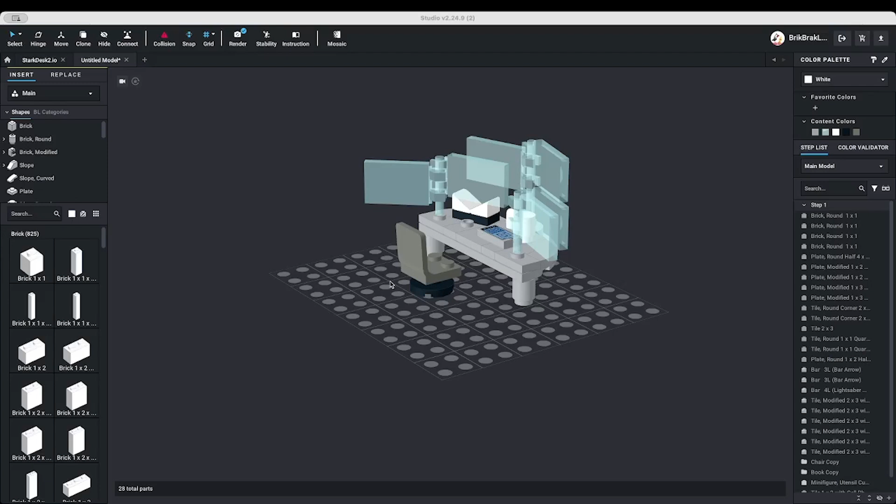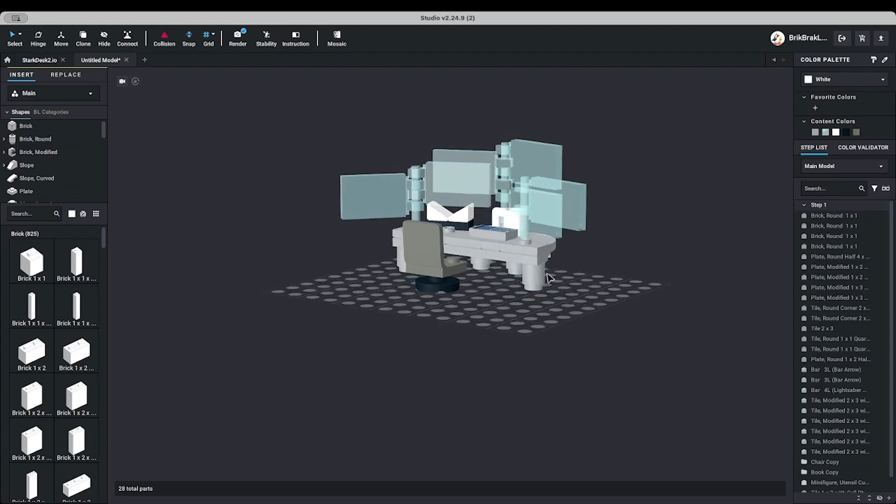Today I'm going to show you how to make instructions. This is my way of making instructions—everybody has their own way, everybody does their own thing. This technique can be applied to small items like Tony Stark's desk here, or to big items like modular builds. It just takes time. Let's get to building.

So here we have everything in step 1, because we've been designing, we've been creating, we've been making something awesome and just letting our creative juices do their thing. We've paid no attention whatsoever to the fact that everything on the build plate is in step 1. There is only one step, guys, one step to this build and none others. So we're done, congratulations—no, we're not done.

We need to make more steps. So what I do is start clicking the add step button, or you can go down here and just start clicking it. It's a little bit responsive—you just gotta click, click, click a bunch. You're gonna be clicking more.

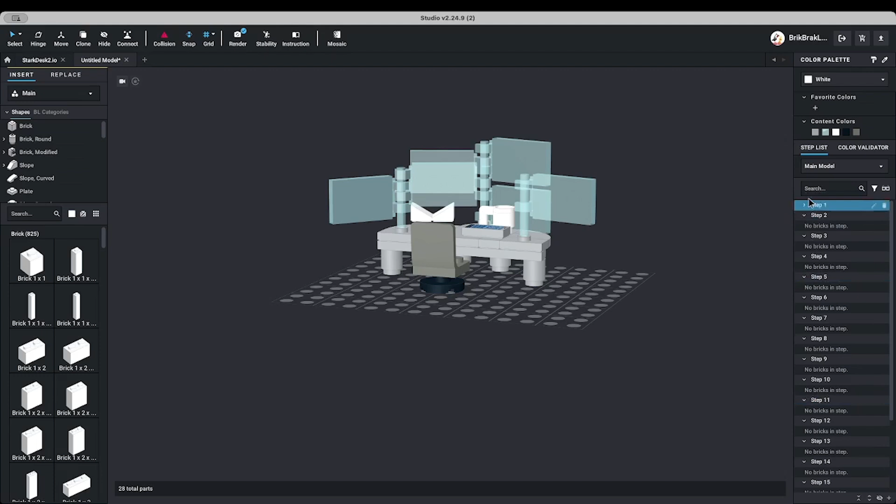Everything's still in step 1, so I'm gonna select it all. I'm gonna go over here to where these steps are, right click, go to Move To, and move it to the next step. In this case, it's going to create a new step, step 20, and put it all in there. Now if we scroll all the way down, you'll see everything is there.

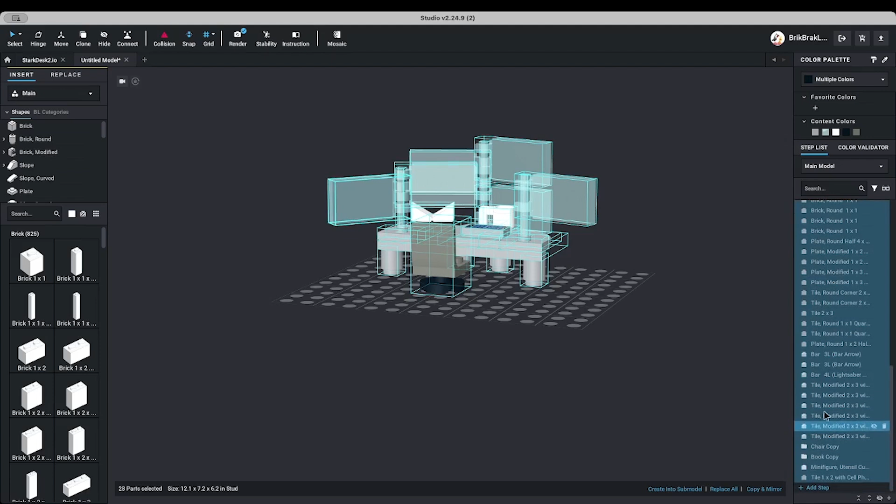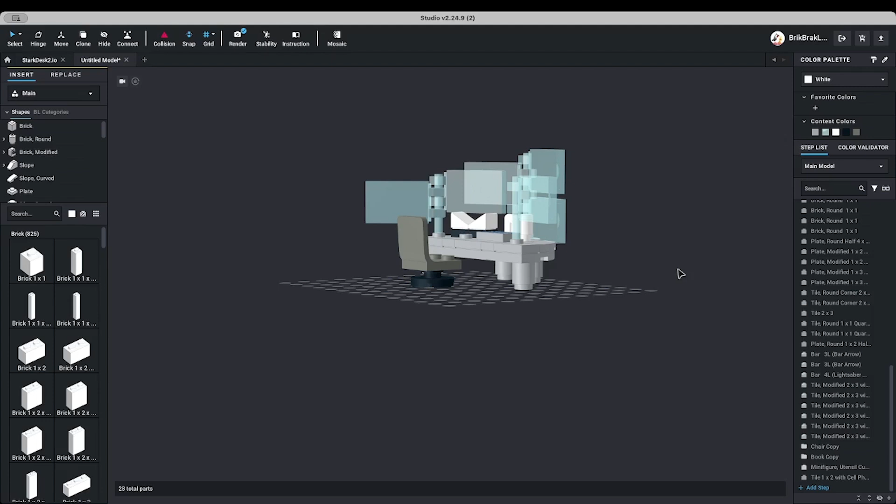Then I unselect and I pick. The way Lego works, in case you didn't know, is you build from the bottom up. You start with a base plate and build up. There are some exceptions to this, but that's kind of the philosophy I go with—build from the bottom up and you'll be fine.

So I'm going to start with the bottom of this piece, which happen to be the legs. I'm going to select this leg and hold down either the command key if you're on an Apple, or the control key if you're on a Windows machine, to select all of those legs. They're highlighted here, and this is going to be my new step 1. I'm going to move it up to step 1.

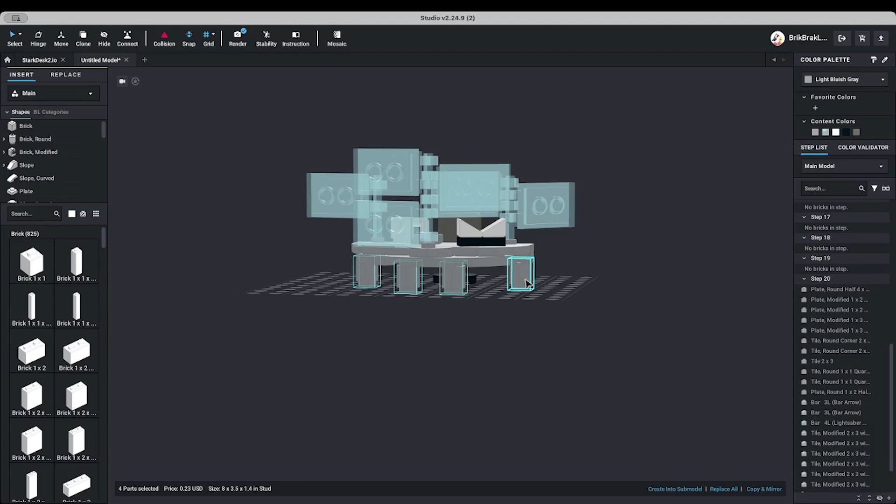Then, because I don't want to get confused and inadvertently put these legs in a different step by misclicking or clicking the wrong thing, I'm going to right click on these pieces and hide them. So now they're hidden—they're up here. You can show all if you need to, but I'm going to hide them, and I'm going to hide every single step that I do. If you're confused, this might make more sense because the process is repeated several times over.

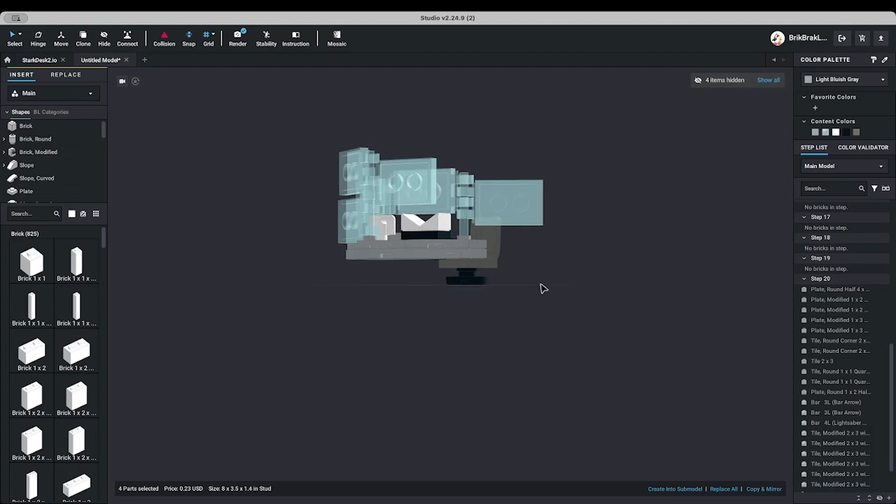So the next piece, attached to my legs, is this plate here. If I had multiple parts in this particular layer of the build, I might add them all to the same step, but this is just going to be step number 2. So I'm going to right click on that piece, move to step 2—there it is, step 2. Then I'm going to click and hide it. For a lot of this process, I'm going to be looking at my build area from this angle, looking up at the pieces.

So then I think what I'll do is go with these straight jumpers. I'll go with these jumpers—we'll do all the jumpers. Make 2 L-shaped pieces going on here. So I'm going to move these to step 3.

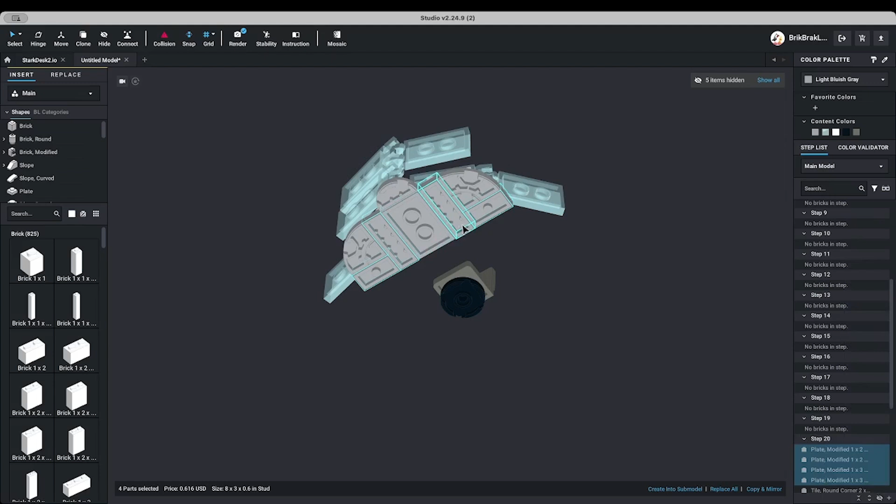This is one of those things where if you have multiple steps, you might be like, oh, which step am I on? All my pieces are selected. Let's scroll up to the top—okay, step 3 has no bricks in it. So let's go back down here, right click, move to step 3. Again, hide. We're still on this layer because we've got multiple pieces on this part of the desk.

So we'll start with this one next. Maybe we'll do these 2 quarter pieces—those can be step 4. I only hide it because I don't want to get confused and accidentally put these pieces in the wrong step. You'll see that right away when, oh, I already forgot which step we're on—you'll see that right away when we get over into the instructions maker. So step 5 is our next step.

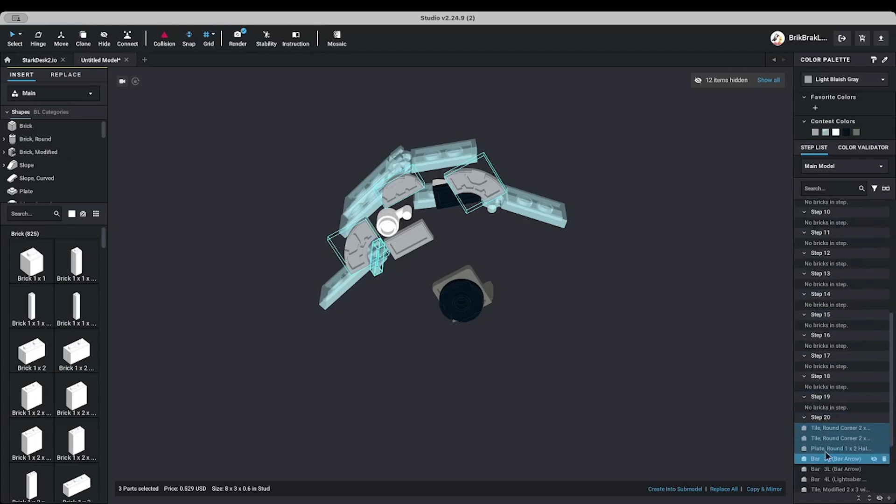How was everybody's day today? This was a crazy week for me. I was under the weather, so I missed a few days of work. The weather was hot, and then it was not. It is very windy today where I'm at.

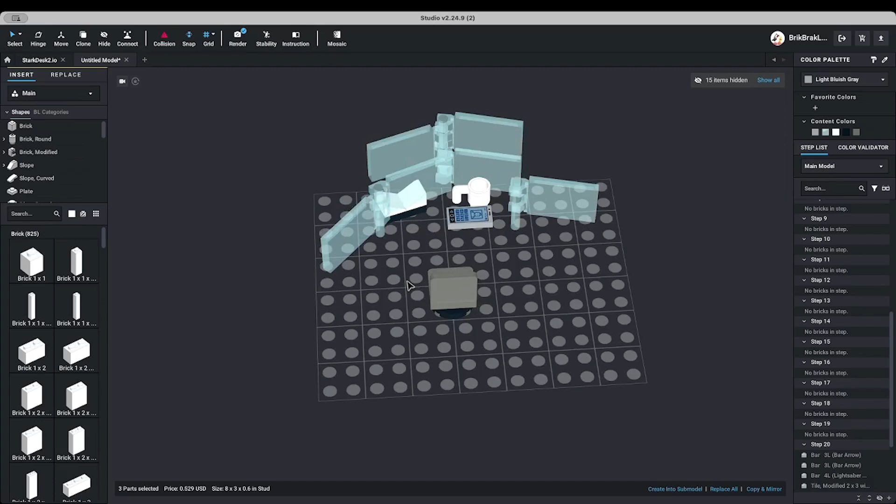So the next layer could possibly be these accessories, but I kind of want to get these computer screens out of the way first. That's just a preference thing, but I feel like accessories like the book, the cup, the cell phone, that's like garnish - the cherry on top where you're almost done, you put these on and it looks fantastic.

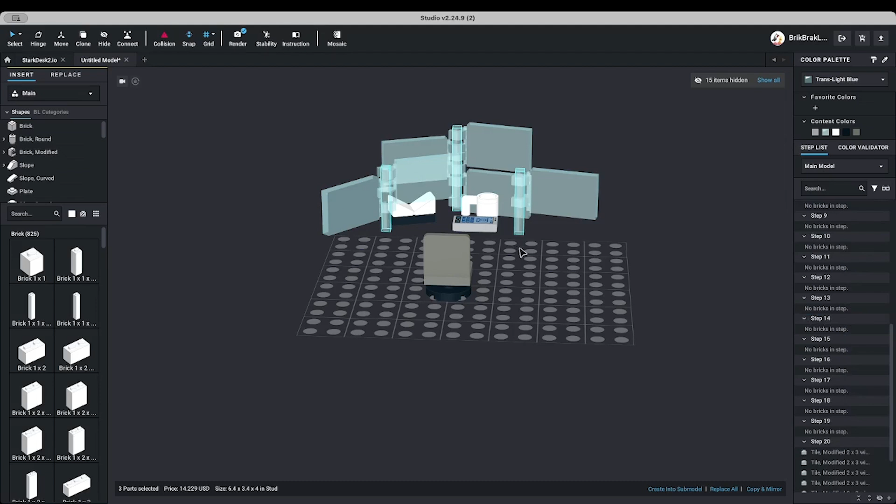So I'm gonna start with these monitors. I want to get these three bars, these 3L and 4L bars, out of the way. I'm gonna make this my next step, which is gonna be step 6. And if you're confused, just bear with me. This will all make sense in 10 minutes, maybe less.

We're gonna hide those. We got monitors facing one way and then the other way, so let's do these monitors first. Let's start with these 2 monitors on this bar.

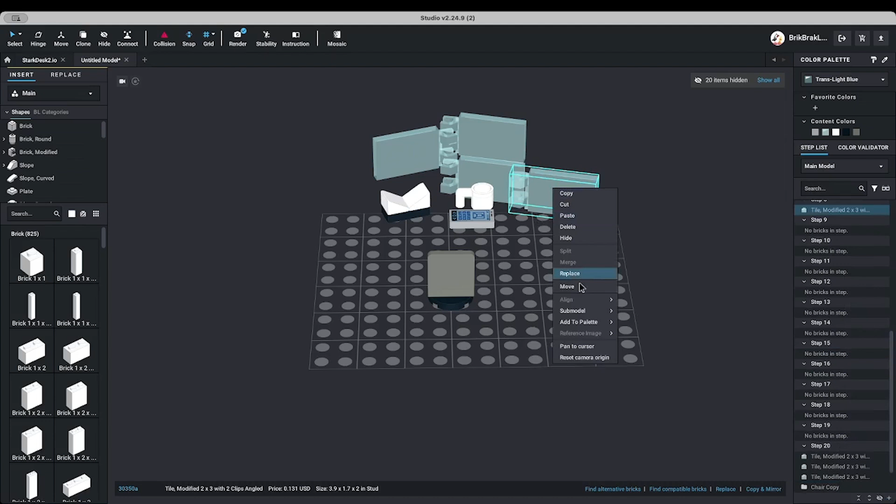Those can be step 7, hide them. This can be step 8 by itself, it's a lone display. Hide it. And this can be step 9. And we'll hide it.

So now we're basically left with a couple things here - our little accessories and 2 submodels. Submodels are important because they appear in our step viewer as a little folder, but there's multiple steps within them. So let's start with this chair. We're gonna say that this chair is step 10, that's where it's gonna show up in our instructions.

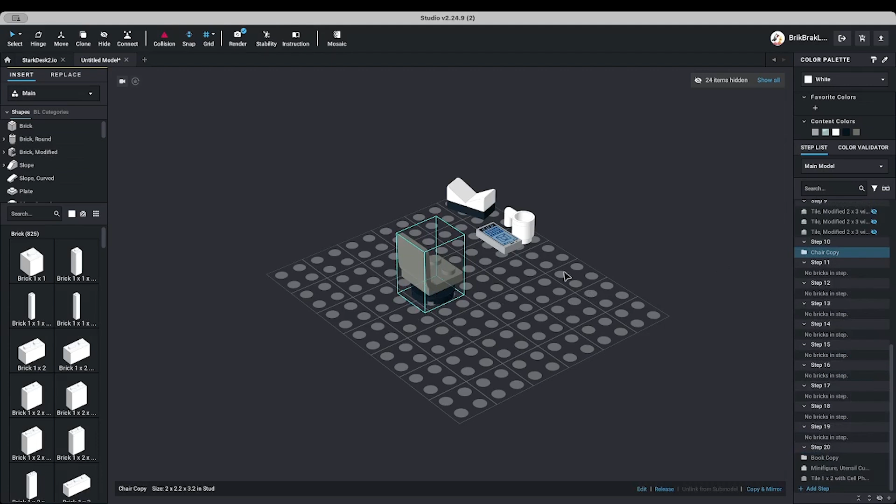However, now we have to go inside this submodel. So we can right click on the piece, go to submodel and view. And you will notice, well, we got multiple steps here. Yeah, so this had already been done, because this is a mock that I have up on Rebrickable, so I had copied and pasted this. This wouldn't look like this.

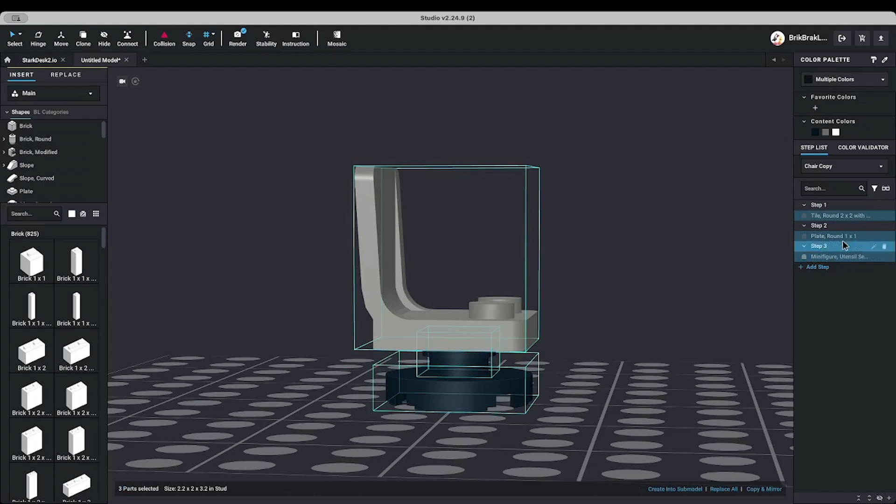What it would look like is, if you were building this from scratch, everything would be in step 1, and you would have no other steps. So again, same process, we're gonna add a few more steps. Spoiler alert, we only need to do this in 3 steps.

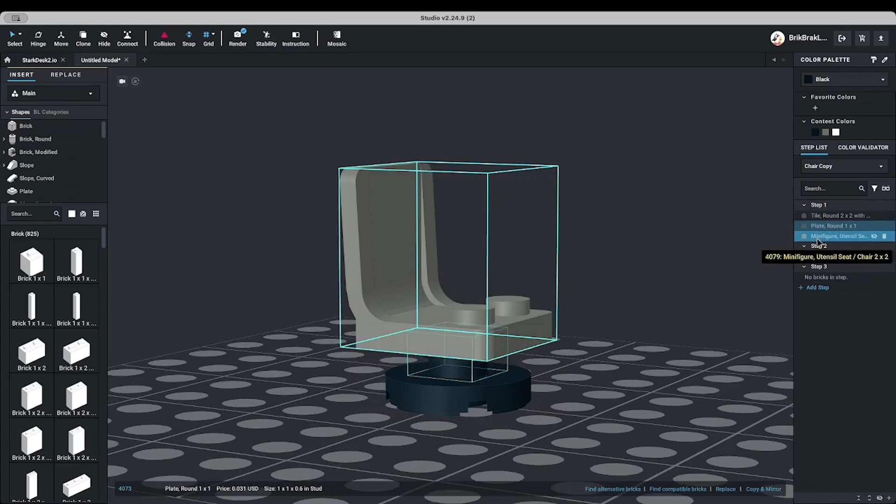We're going to make building from the bottom up. This is our base, that piece there, the 2x2 round. So we're just gonna take these 2 guys, we can drag them - you don't have to right click and move, you can drag them. So there's our first piece, there is our 1x1 round, and there's the chair itself.

So that step is done. And when we go over to the instructions, we'll see what that looks like. So we got our chair, let's make it disappear. Then we will do...

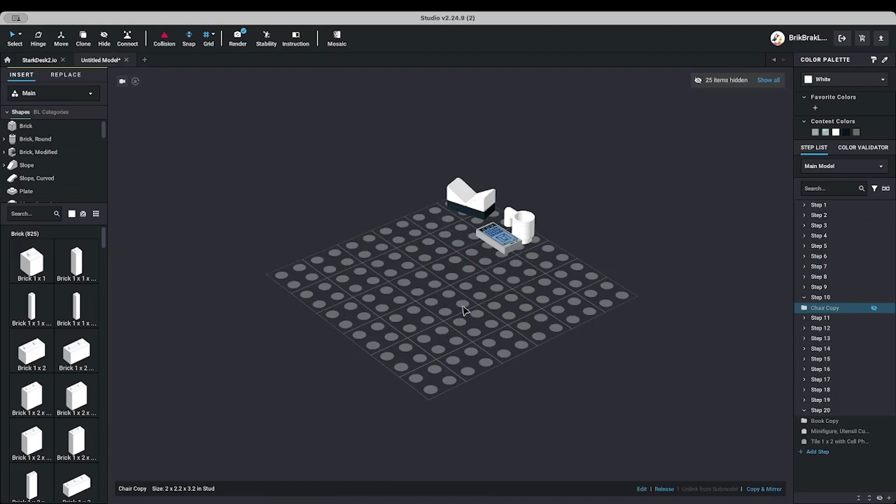the cell phone and the mug can be another step. And when you go in and out of submodels, it'll collapse all of your steps. But if you go down here, the arrows pointing outwards will open them all up. So if you click the down arrows, it will collapse everything. We still are working in them, so we want to open them all up.

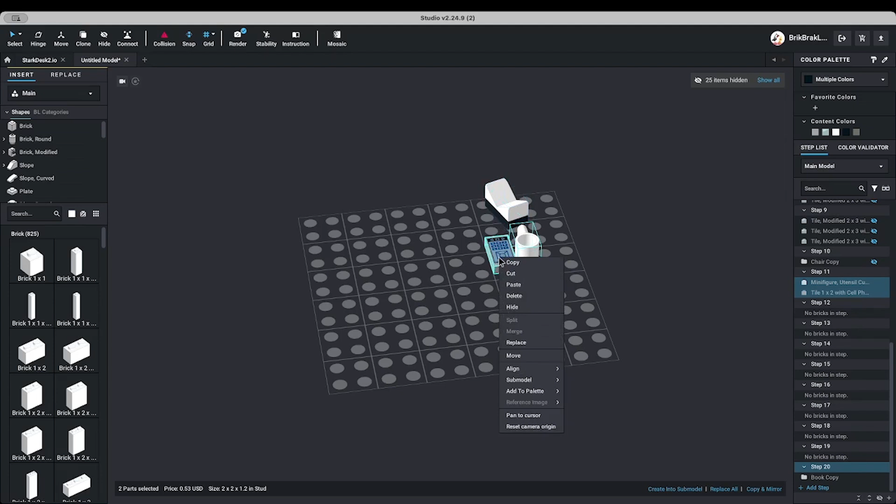All right, so our chair is step 10. We are going to make the mug and the cell phone step 11. Hide it all and round it off with this submodel of the book, which will be step 12, the final step in the piece.

Make sure our submodel of the book is good to go. So we select it, we right click on it, view. Whoa, that's a huge book. Yeah, see, this is what it's supposed to look like, all in one step.

So we're gonna add a couple more, we'll just add 2 steps for this. Let's not go crazy over here. We're gonna leave our plate there. We're gonna take our 2 slopes, drag them down here.

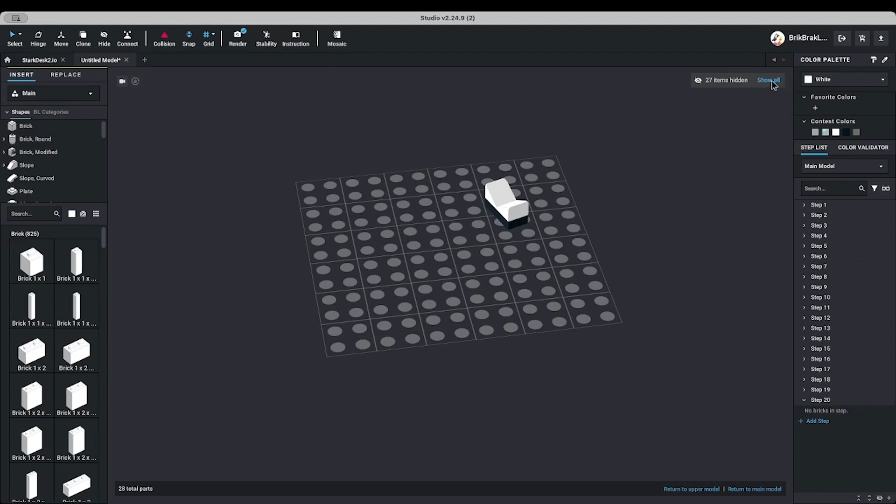Now, cool thing we can do - let's go back to, all right, so everything's there now, so we'll show it all again. We got all our steps in one place. Let me just show you something cool real quick. Oh, something happened, everything went crazy. Let's lift it all up, put it back on the plate.

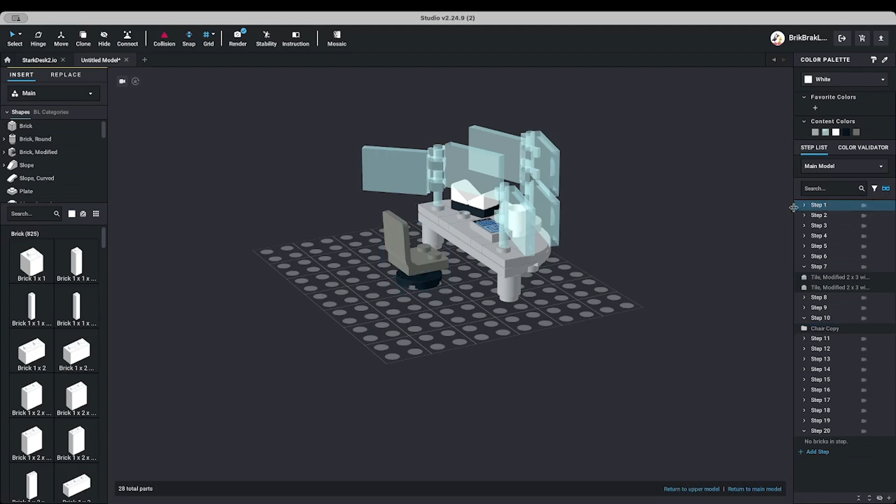If you get confused, or you have a submodel or the whole model that has multiple pieces, you can put this into what is called step view. And step view, I'm going to go back up here - step view is going to show you whatever step you have selected. So I have it in step view.

I click on step 1, it's only going to show me step 1. I click on step 2, it's showing me step 1 and 2, and so on and so forth. So you can see the building process happen right before your eyes. That is a cool thing to toggle on and off.

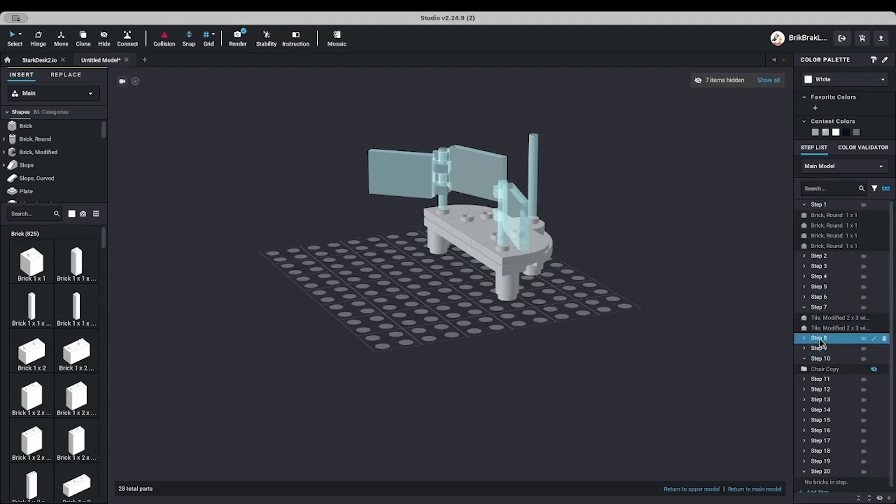Especially, this is a very simplistic build. If you were building a modular building, it's very easy to get confused. Maybe I'll do a live one day where I'll just be showing how I do a modular building. I don't know. But in the meantime, we have this.

We have all our steps in place. So the first thing we're going to want to do is save this. And now that it's saved, we are going to go into the instruction mode. And instruction mode has 2 panels.

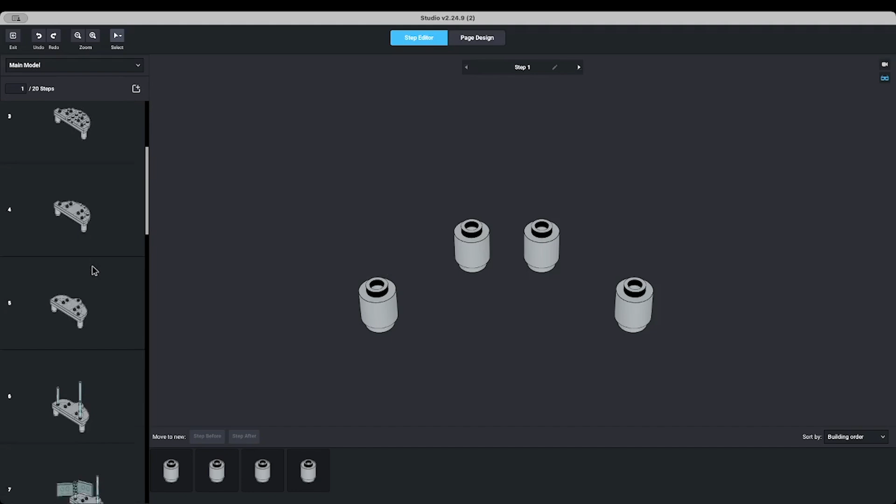It has the step editor, which I don't really pay much attention to. I'm open to hear what you think about creating instructions in the comments, because this is just sort of the way I've done it. I've kind of picked up on it on my own, seen a few YouTube videos, but this is what works for me. If I'm reinventing the wheel here, please let me know. I don't know what the step editor does except show you step by step. I'm more concerned with the page design.

The page design is what looks like your standard Lego instruction setup, step 1, step 2, and so on. Now they kind of throw them together, but I have my own little personal quirks about it. Like I like to put the inventory box over here on the right of the page, and I also like to try to line this up to center as much as possible.

Now, if this was a very complex build, dedicating one page for each item is cool, but you've got some layout options to work on, especially if you're doing smaller builds, which I recommend. If you're getting into this, don't go crazy. Don't try to build the Avengers Tower right out the gate. Build something small and awesome and go with it, because that will help you develop these skills that'll become second nature to you as far as the design process and the instruction process. So I'm going to spend a little bit of time on this because it'll really make your instructions pop for these smaller builds.

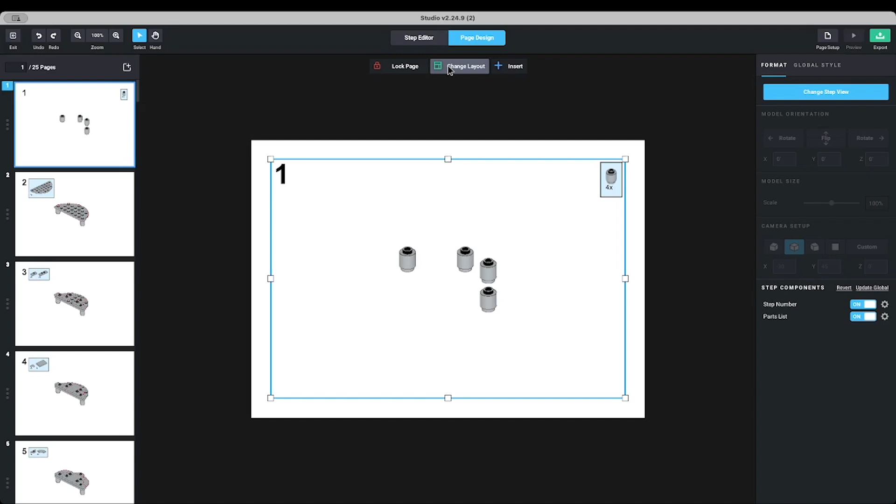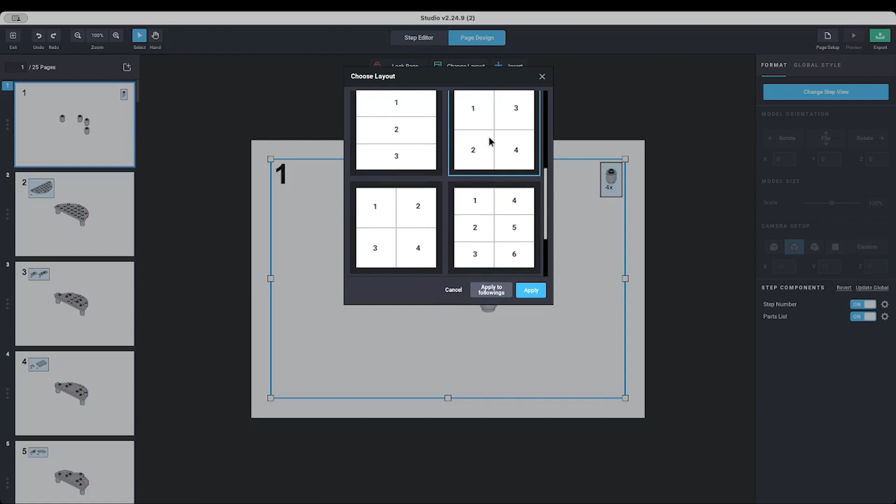So I'm going to go to change layout, and I can put multiple steps on a page. For something small like this, let's try it out. We can always go back. So let's try this: the first step's going to be here, then down here in the bottom, 2, 3, 4. You can also do 1, 2, 3, 4 - it's strictly a preference thing. But let's do this one. So we're going to click there, hit apply, and now it's going to put the first 4 steps on our build.

I had already moved my inventory for step 1 over. That looks pretty tight, so we're going to go with it. I'm going to move this one over. And another thing that I don't like is when the inventory box sort of bleeds into what it's supposed to look like, especially when it's going over pieces in that step.

So what I'll do is click on sections of the instructions. I'm going to click on the inventory box and scale this down. I'm going to pick a number - I could use the little slider, but I like to be consistent. So for this, I'm going to say 50%. That makes it smaller, but again, when you're printing it out, when you're looking at this in a PDF, you can zoom in, whatever. If the parts are still visible and identifiable, then you should be good.

So 50% for that looks good. This might be a little ridiculous, but let's try it at 50. Yeah, 50, that looks fine. I mean, it's a little over - it goes against my rule that I just shared, but it's not covering the whole piece. Same thing here, it's a little over, but let's do 75 for this one. Do it in multiples of 25, I guess. You could go down to 50 if you wanted to for this, because these are still pretty identifiable. Or 50, that's cool too. But yeah, something like that.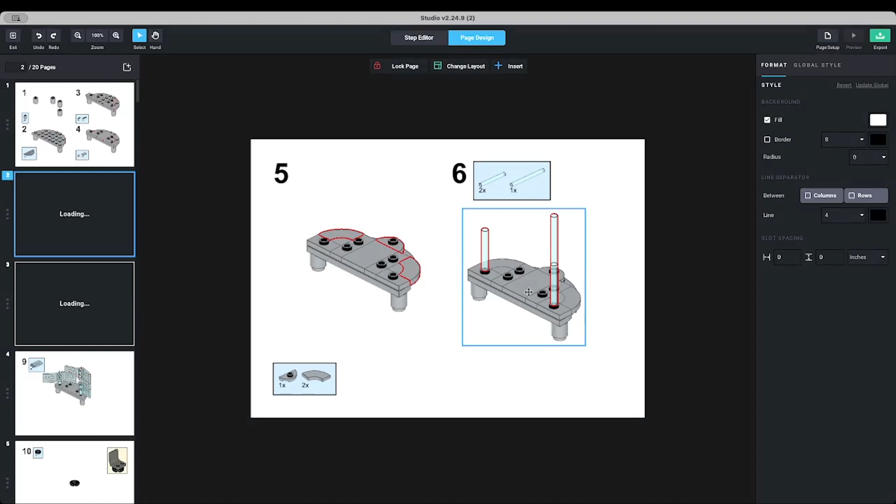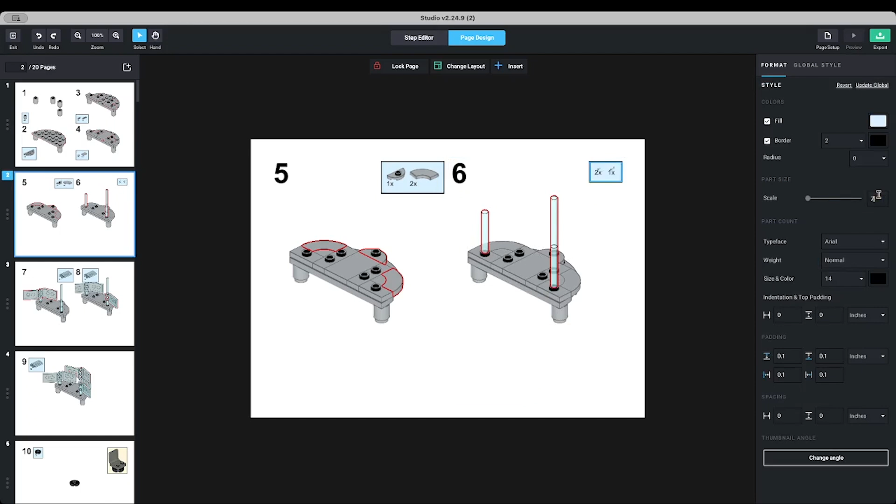It might be a better option to change this layout to maybe just put 2 on the page. All right, yeah, that looks nicer. And these are the kind of things you need to sort of roll with while you're doing this part of the building, the designing process - seeing what works, seeing what doesn't. Don't be 100% committed to one particular style unless the piece that you've designed fits on it.

I like to follow the guidelines unless they're cutting off the piece, like they do in this case. That's fine because when you change it up here, the next step will follow the pattern you changed it to, if that makes sense.

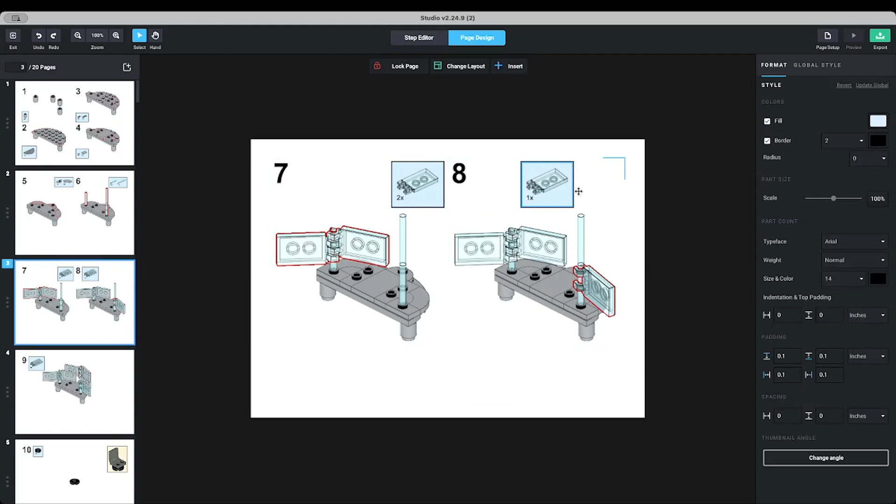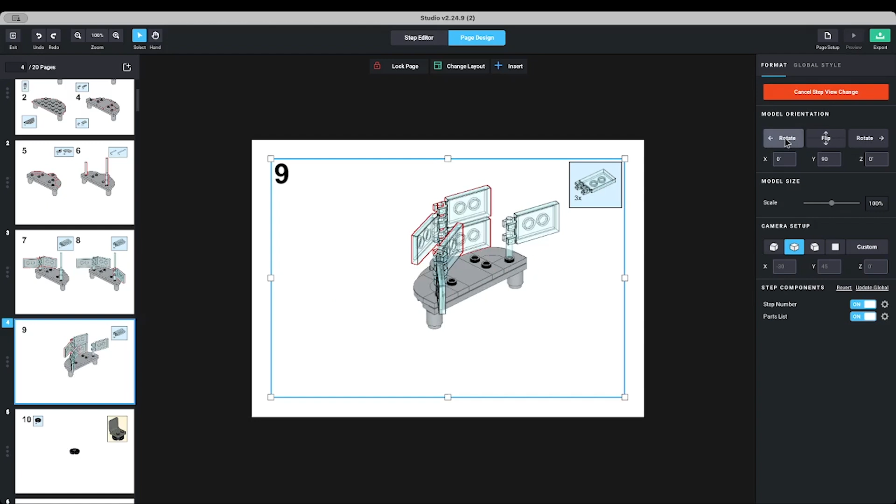Now this I'm just going to keep on one page and center it because it's just finishing up the screens. If I wanted to get fancy, and maybe it wasn't showing me the new pieces really well, I could change the step view and do things like rotate the piece to display what I'm putting on it better.

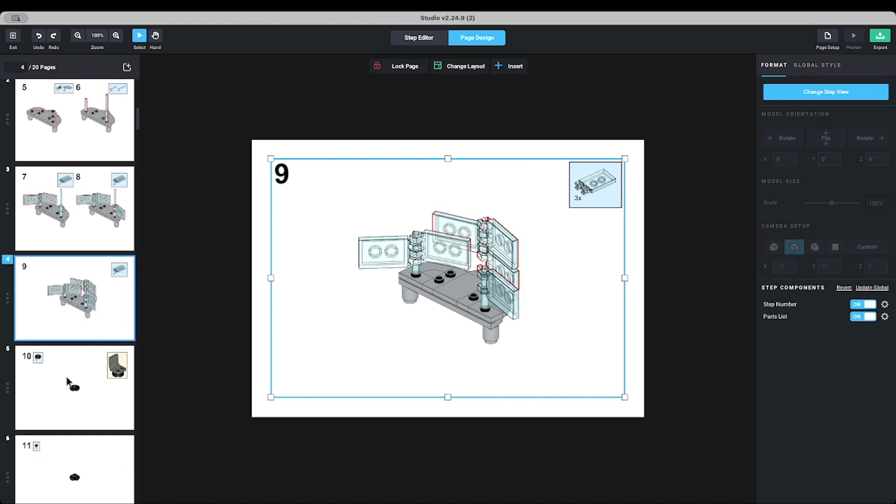For this, I'm just going to keep it the way it is, because we essentially finished in step 9 with the desk and the monitors. Step 10 is interesting because it's the start of the chair.

Now the chair is very simple, so what we can do with the chair, if we click on this, we can convert this to what's called a call out. This is when I'll click it and show you. A call out shows you the instructions and then shows you where to put it in the finished, in the rest of the build.

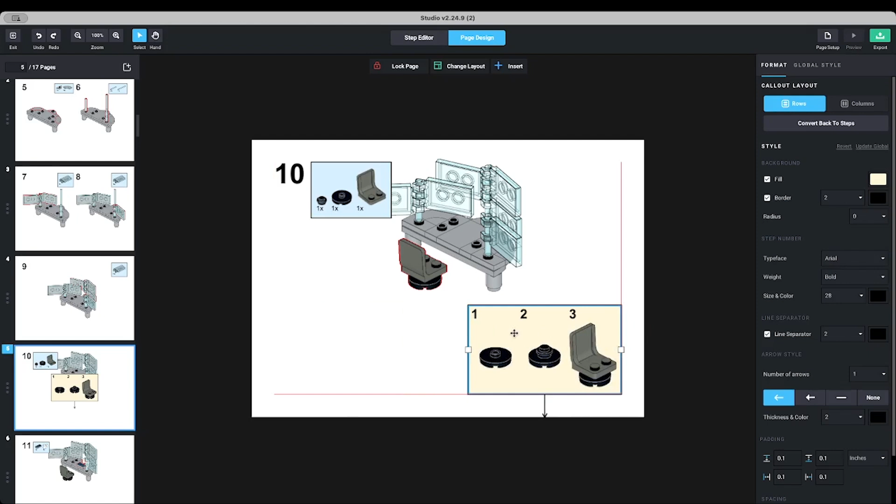We'll put the call out back over here in this corner, line it up all nice and pretty. Grab the arrow, and we'll grab the other end of the arrow. We'll continue to grab the arrow, and put it up here. So this is a call out.

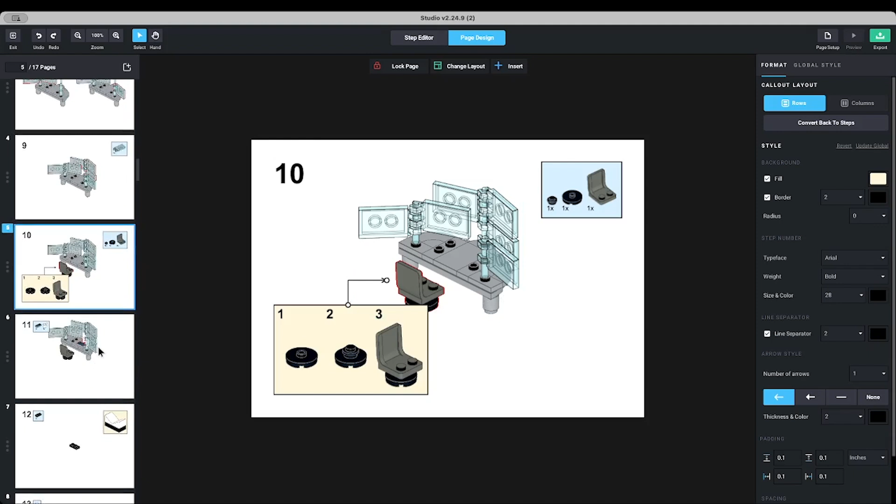This is an instruction that's showing you, okay, you do this, then that, and then that, and then you put it there in front of the desk. Call outs are cool for little repetitive items or small items like that.

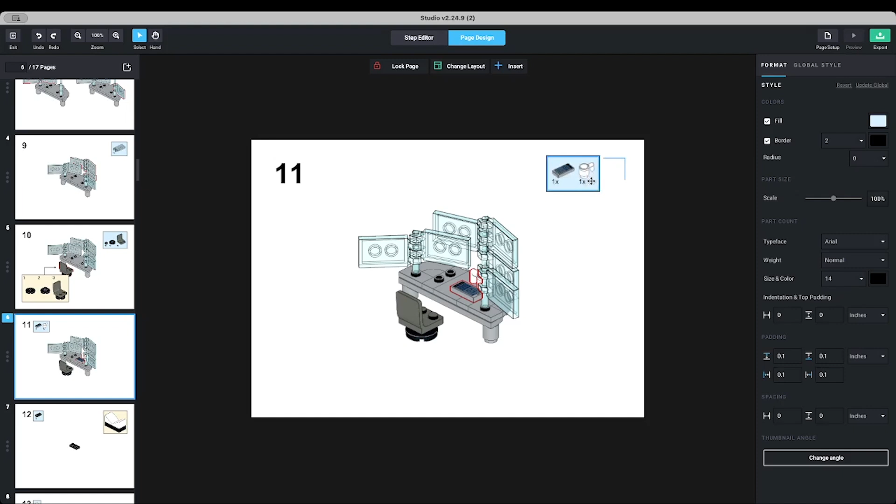Let's move this all down here, we're going to center it, and we're going to move our cell phone and our coffee mug over. Does Tony Stark drink coffee? Or is it just tea?

This is another example of a good way we could use a call out because it's such a small piece, literally 3 pieces. So we're going to convert to call out. Oh yeah, this will look a lot better once we move everything around. So we'll put that there.

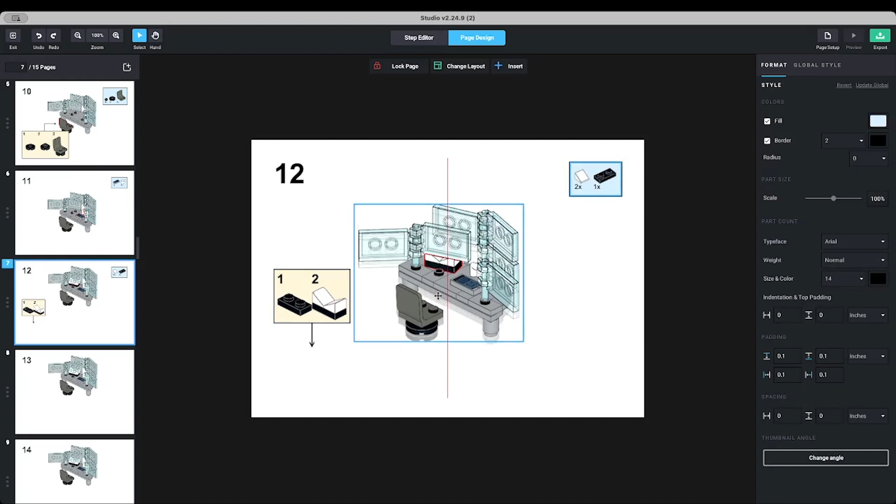Actually, let's change the step view and rotate it, see if there's a better angle. 145, that's a little better. Yeah, I'm not totally sold on it, but that's okay, we'll run with it.

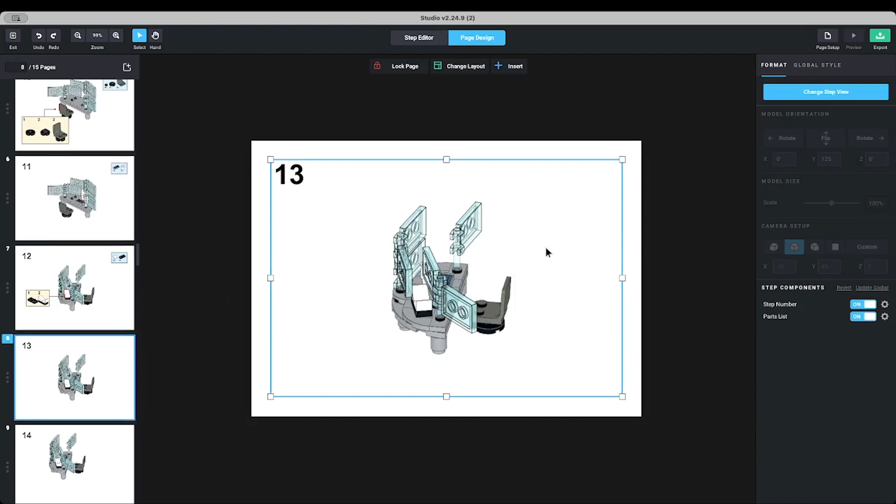We'll set up our call out here, grab the little arrow, move it up. So this is the finished piece, and now we get to this step, and it doesn't look like the way we want it. So we're going to change the step view, rotate it back around. That's good, that's how we want it to look.

That's what the box art would look like. Now, if you remember from way back before we got into instruction view, you'll notice that we kept a bunch of blank steps open. And that's what these are, all those empty steps.

So let's go back. Actually, let's save first, and let's exit the instruction editor and go back to our step view. Expand them all, and we see all these empty steps. So we want to get rid of these.

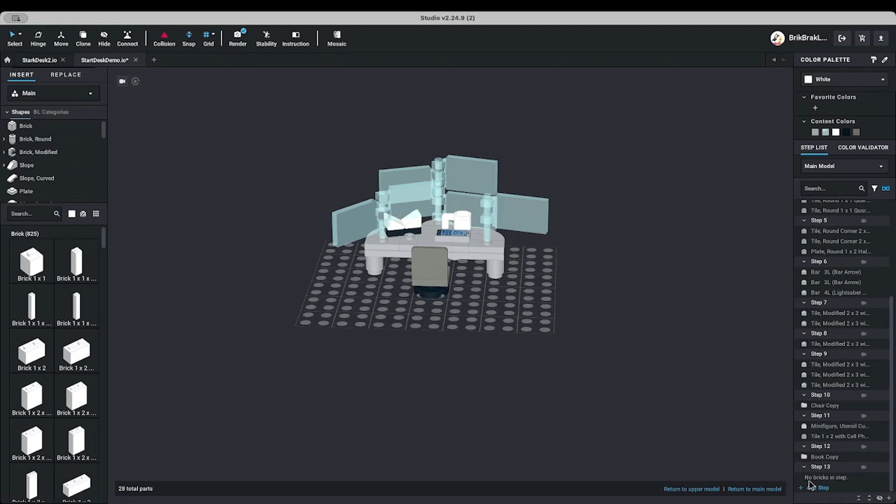I'll start from the bottom because I don't want to accidentally delete a step that has stuff in it, because that'll actually delete things. Now what I like to do is leave one step empty at the end.

And the reason why I like to do that is when I go in here to my step page design, this is our last step where we place an item, and then we're showing the finished build. And what Lego likes to do is put a little ta-da kind of star thing going on.

And you can do that too, because we've got this insert button here, and we can insert an image. I have one of my folders of templates and stuff that I use for design work, so I've got this star pattern here. What I like to do is expand it like so, and cover the piece entirely.

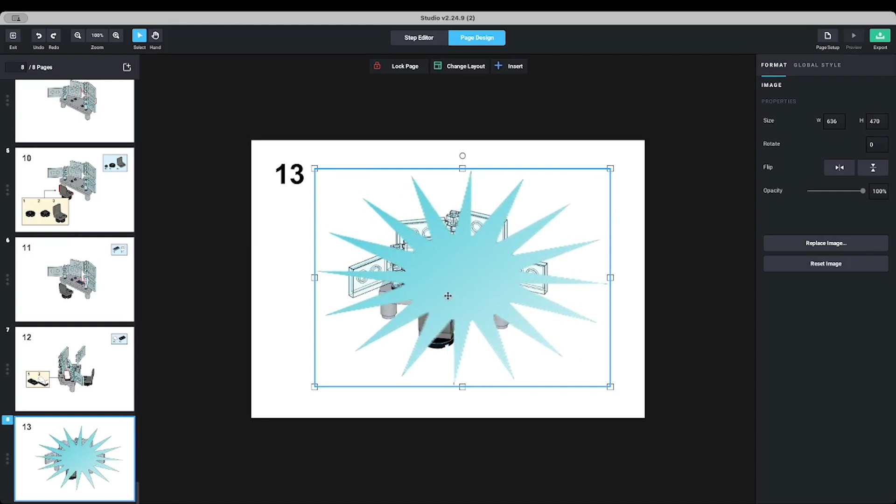And then I will right click and send it to the back. Ta-da! So now we have our finished product.

So from here, we can export it as a PDF, and when it exports, then we have it as a PDF.

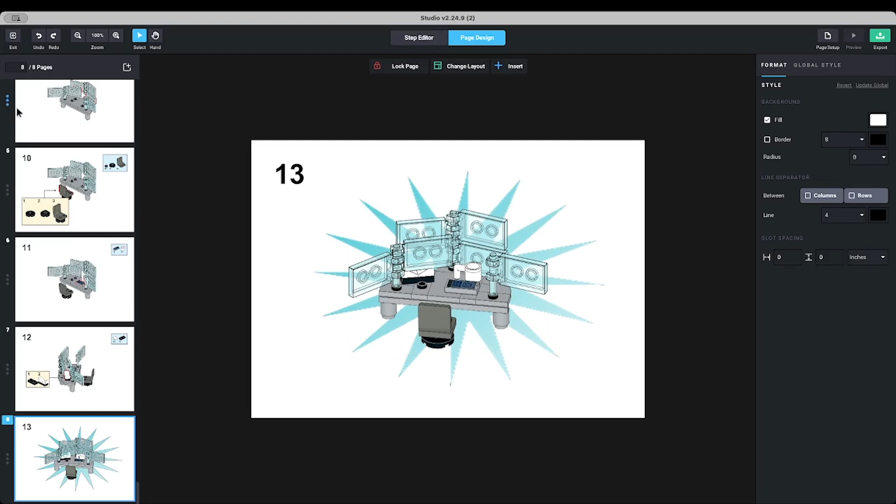If we were making this for Rebrickable, what we could do is insert a page before this page, and then insert a new image of the cover of our instructions. You can make it look like a Lego thing, you can make it your own design, which is pretty cool. I particularly have this BrickBrak's magazine theme that I like to roll out my designs on.

So this is where we get creative and let our graphic design person get out and do his thing or her thing. And this is just a rough guide to how instructions are made, especially if you've been struggling on them.